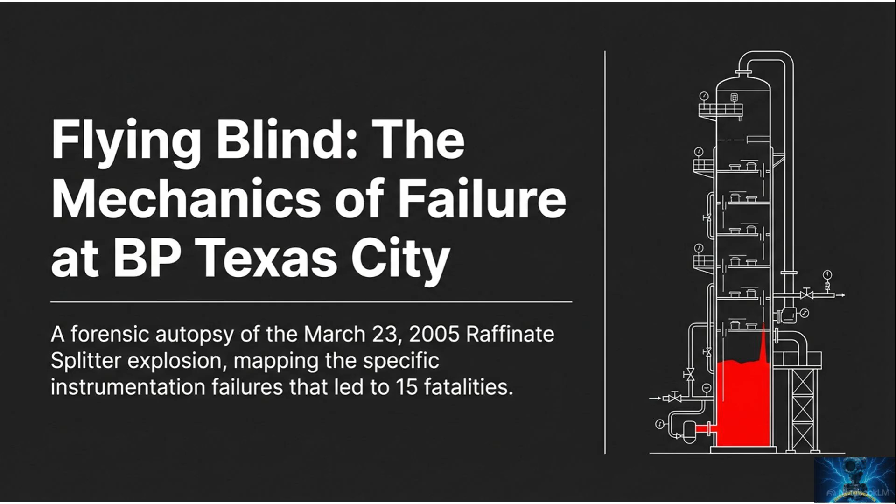On March 23, 2005, the BP Texas City refinery suffered one of the worst industrial disasters in recent United States history. This presentation is a forensic breakdown of how that happened, not as a single freak event, but as a chain of instrumentation failures, degraded safeguards, and management choices. The core lesson is brutally simple: when operators lose sight of physical reality, the plant starts writing its own ending.

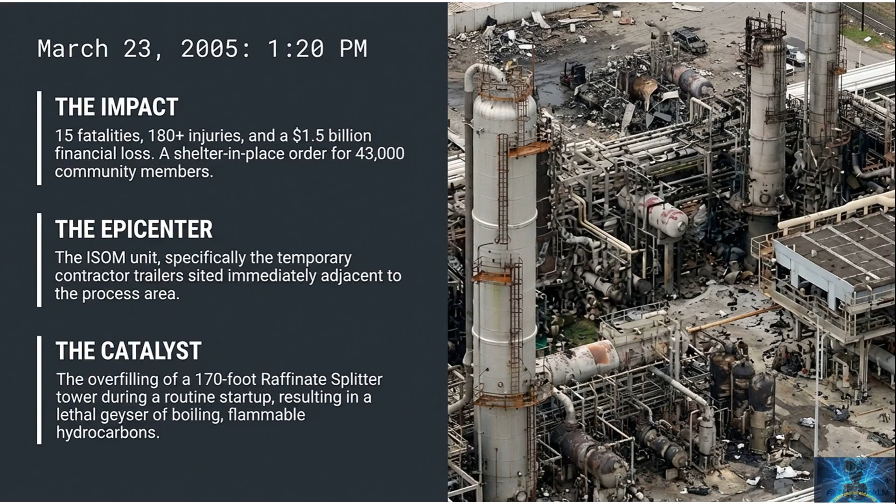March 23, 2005, 1:20 p.m. At 1:20 in the afternoon, an overfilled raffinate splitter tower sent flammable hydrocarbons into a blowdown system that vented to the atmosphere instead of a flare. The result was 15 fatalities, more than 180 injuries, a shelter-in-place order for 43,000 people, and losses exceeding $1.5 billion. The explosion's epicenter was the isomerization unit, especially the temporary contractor trailers placed dangerously close to the process area.

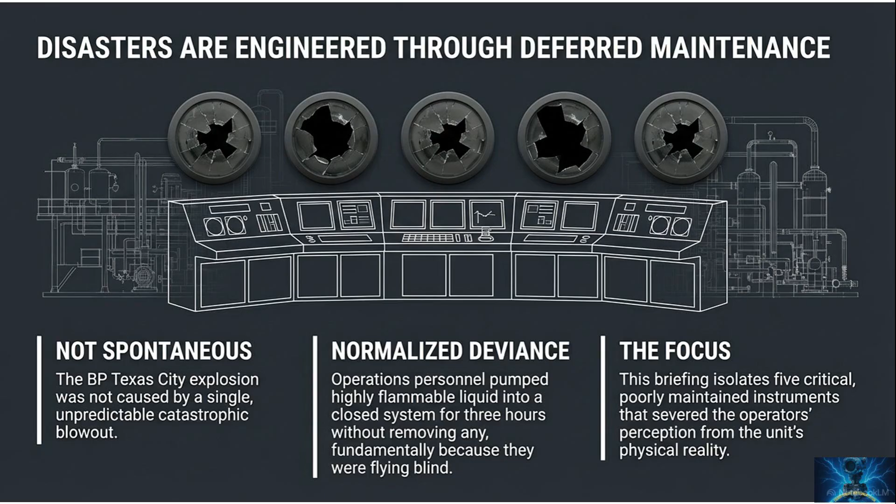Disasters are engineered through deferred maintenance. This disaster was not spontaneous, and it was not just one operator making one bad move. It was built over time through deferred maintenance, weak mechanical integrity, and a culture that normalized deviation from procedure. The real story is not just what failed on March 23rd. The real story is why known problems were allowed to sit there long enough to become fatal.

The apparatus: isom raffinate splitter. The raffinate splitter's job was to separate straight-chain hydrocarbons into higher octane products for gasoline blending. But this tower depended heavily on manual operation and a handful of critical instruments to keep it from overfilling. There was no automatic high-level shutdown interlock to save the day. If the instruments lied, and if operators believed them, the unit had very little protection left.

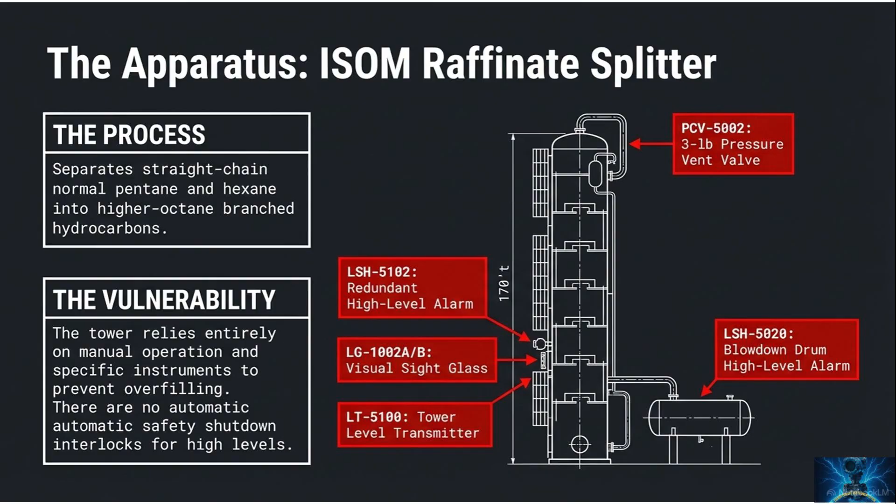By 11:16, the board showed about 93% level, while the real liquid level had climbed to 67 feet. By 12:41, the display suggested about 80% and falling, but the tower was actually around 140 feet full and nearing disaster.

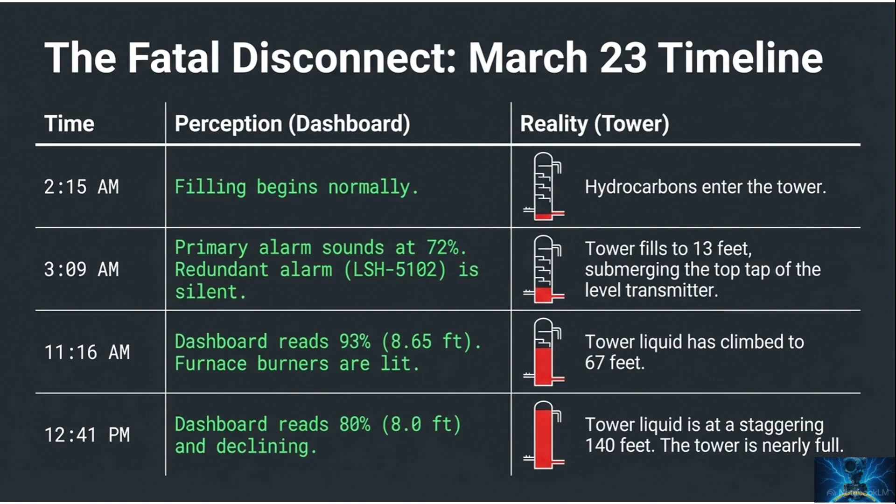1:04 p.m., the blind pilot. By 1:04 in the afternoon, the real liquid level inside the 170-foot tower had reached 158 feet. But the control board still showed only 78%, or about 7.9 feet, on the transmitter's scale. So the operators were effectively flying blind.

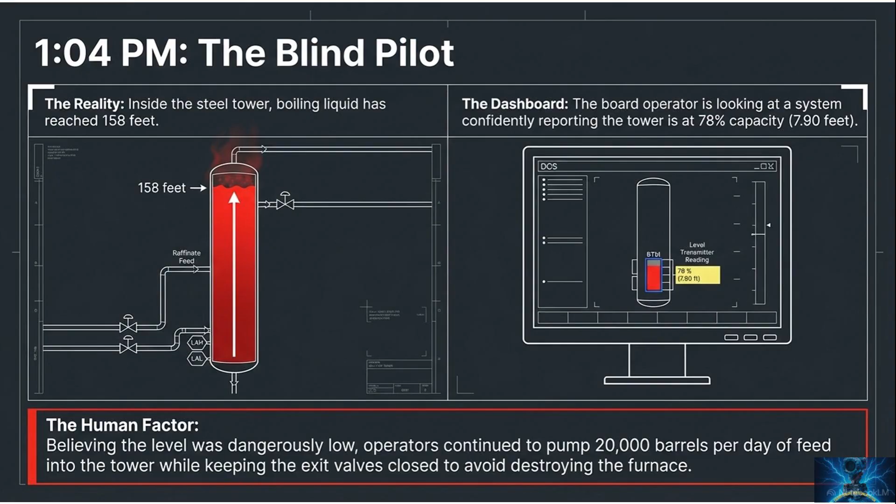Believing the level was low and falling, they kept feeding the system and trying to protect the furnace, not realizing the column was almost completely full.

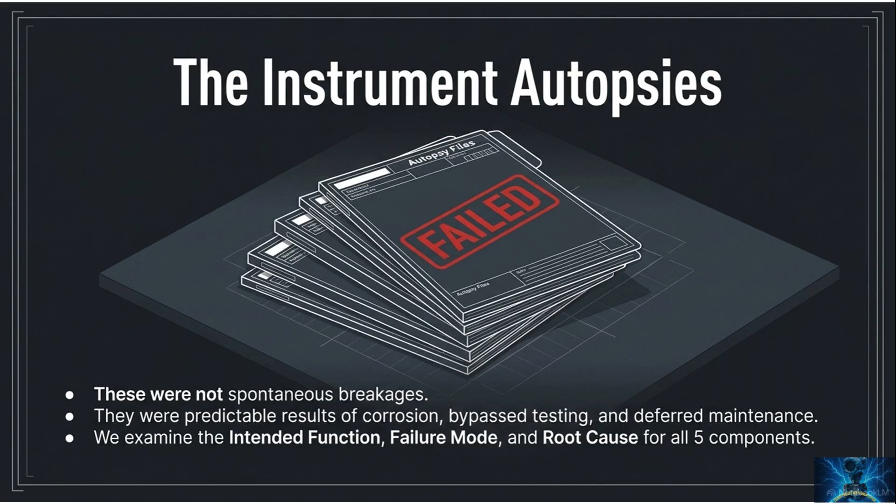The instrument autopsies. Now we move from the big picture into the 5 specific failures that broke the operator's dashboard. These were not random breakages. They were predictable outcomes of corrosion, miscalibration, poor testing methods, incomplete maintenance records, and repairs that were deferred even though the unit was about to start up. Each failed layer made the next bad decision more likely.

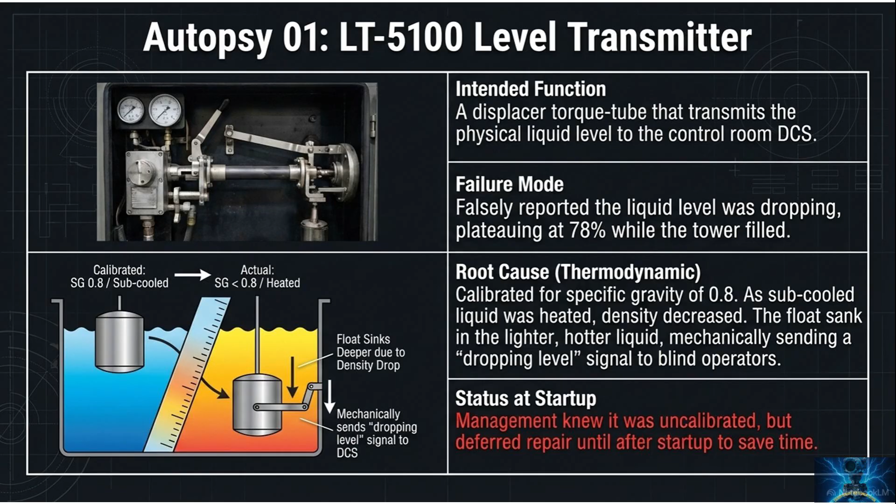The root problem was thermodynamic and maintenance related. It had been calibrated for the wrong specific gravity, and as the liquid heated up and became less dense, the displacer sank deeper and mechanically created a false, dropping level signal. Management knew repairs were needed, but deferred them until after startup. That is industrial Russian roulette with a clipboard.

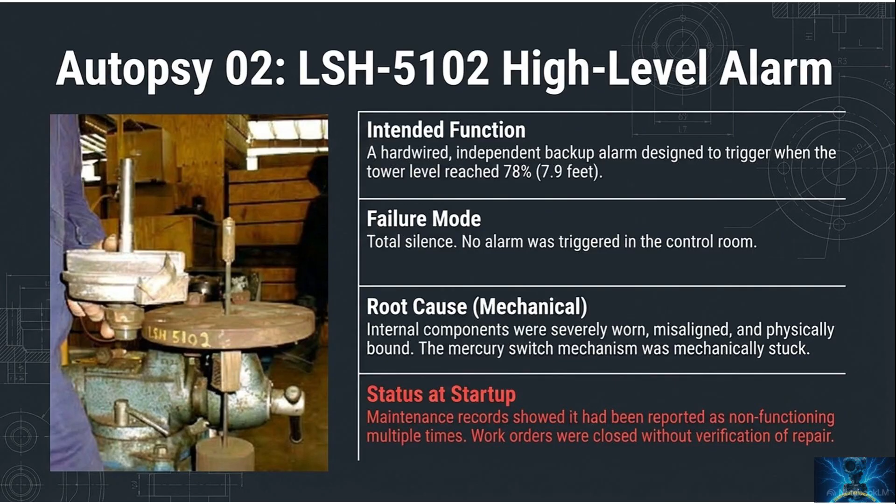Autopsy 02, LSH 5102, high-level alarm. This redundant high-level alarm was supposed to be the independent backup warning if the tower reached a dangerous level. It never sounded. The internal mechanism was worn, misaligned, and physically bound, so the alarm stayed silent when it was needed most. Worse, maintenance records showed it had already been reported as non-functioning multiple times, and work orders were closed without verifying the repair had actually been completed.

Autopsy 03, LG 102A, B sight glass. The sight glass was supposed to give operators a simple visual truth check. Instead, it was completely unreadable because the inside had been coated with years of dark hydrocarbon deposits. That meant the operators had no trustworthy visual backup to challenge the false transmitter reading. So one of the most basic safeguards in the entire system became a piece of dirty glass bolted to the side of a tower.

Autopsy 04, PCV 5002, pressure control valve. This manual pressure vent valve was supposed to help relieve non-condensable gases during startup and prevent pressure spikes.

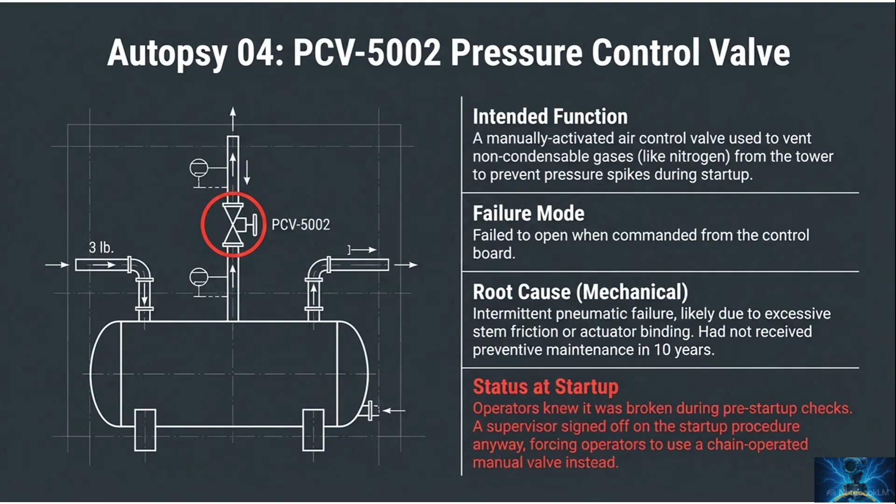During pre-startup checks, it failed to open when commanded. Even so, startup was authorized anyway, forcing operators to rely on a chain-operated manual valve as a workaround. A known bad pressure control element was accepted before the system was even brought online.

Autopsy 05, LSH 5020, blowdown drum alarm. This was the last line of defense. If liquid started filling the blowdown drum, this alarm should have warned operators before the stack turned into a hydrocarbon geyser. Instead, the alarm never sounded because the float had corroded, developed a hole, filled with liquid, and sank.

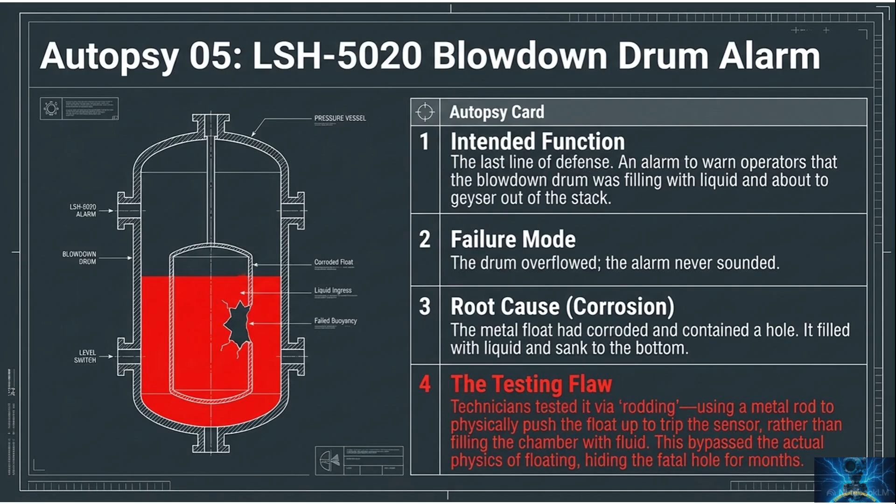The truly maddening part is the test method. Technicians often rodded the float by physically pushing it, which bypassed the actual physics of buoyancy and hid the defect for months. That is not testing. That is fooling yourself with extra steps.

The physics of the overflow. Once the tower was badly overfilled with subcooled liquid, the furnace burners heated that liquid rapidly. As the fluid temperature rose, the liquid expanded and began to boil violently. This was no longer normal distillation behavior.

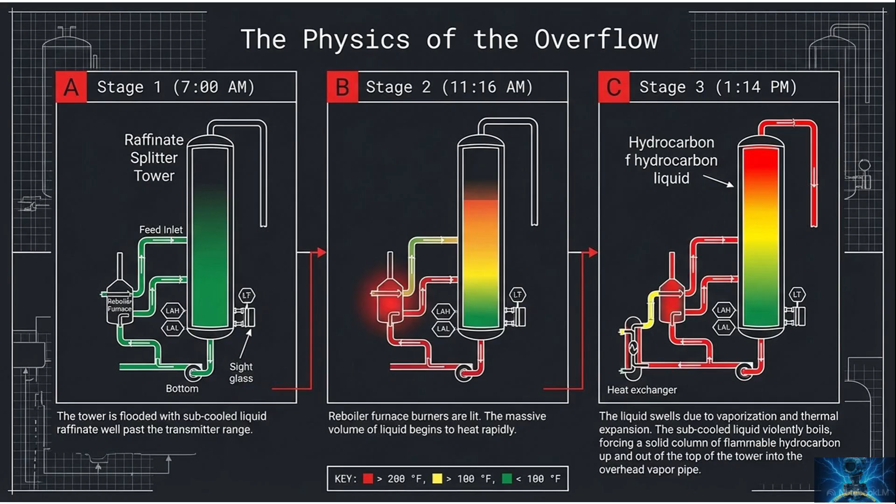It became a solid rising column of flammable hydrocarbon driven upward until it spilled into the overhead vapor line. The system was no longer separating product. It was becoming a giant pressurized launcher.

The hydrostatic trap. Here is the nasty bit of physics that made the relief valves open. The overhead line ran 148 feet down the side of the tower to the relief valves. Once that pipe filled with liquid, the hydrostatic head added about 42 pounds per square inch gauge at the bottom.

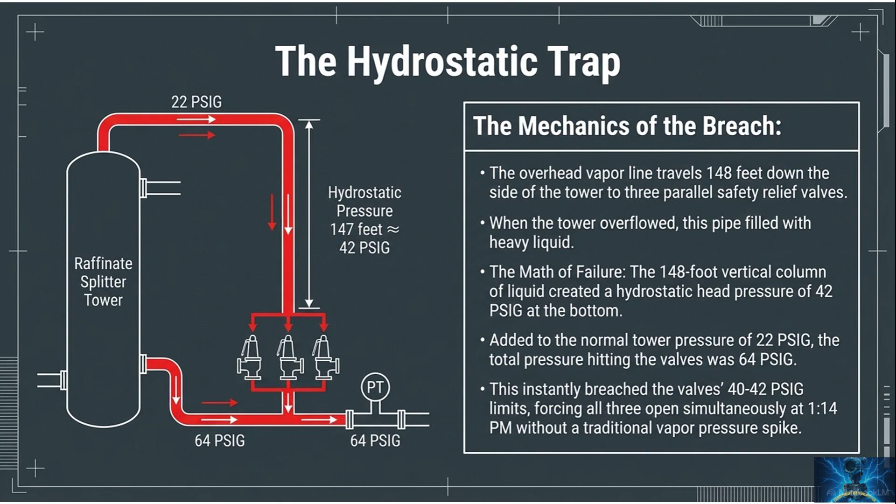Add that to the normal tower pressure of roughly 22 pounds per square inch gauge, and the relief valves suddenly saw around 64 pounds per square inch gauge. Their set points were about 40 to 42, so all three opened. No dramatic vapor surge was needed. Simple liquid head did the job. Physics does not care about what the board operator hoped was happening.

The geyser. A 1950s relic fails. For just over 6 minutes, all three relief valves discharged at capacity. About 51,900 gallons of flammable liquid went into an old blowdown drum and atmospheric stack that had never been connected to a flare. This was a disposal design from the 1950s, still being trusted in 2005.

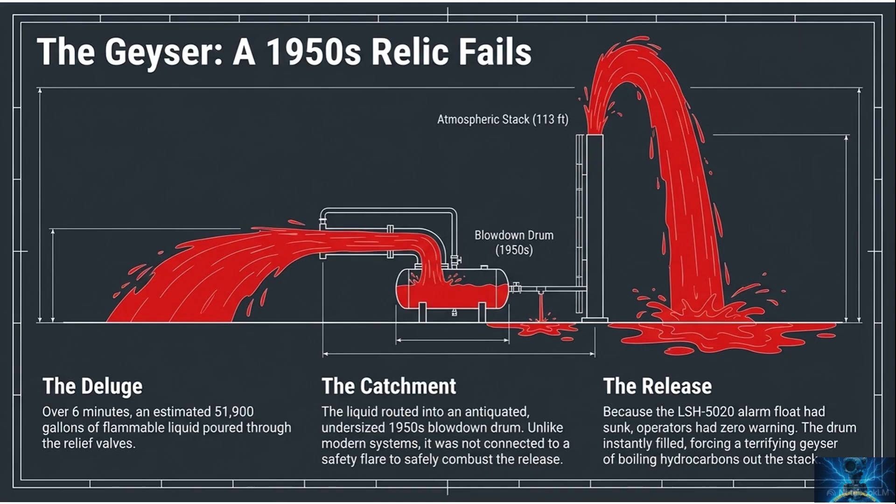Once the drum filled, boiling hydrocarbons blasted out of the 113-foot stack and rained back down into the unit. A modern flare system would have been a very different story.

Confinement and ignition. As the hot liquid fell, it atomized, pooled, evaporated, and formed a wide flammable vapor cloud at ground level. The most likely ignition source was an idling diesel pickup truck parked about 25 feet from the blowdown drum. Witnesses reported the engine over-revving and backfiring as the vapor cloud reached it.

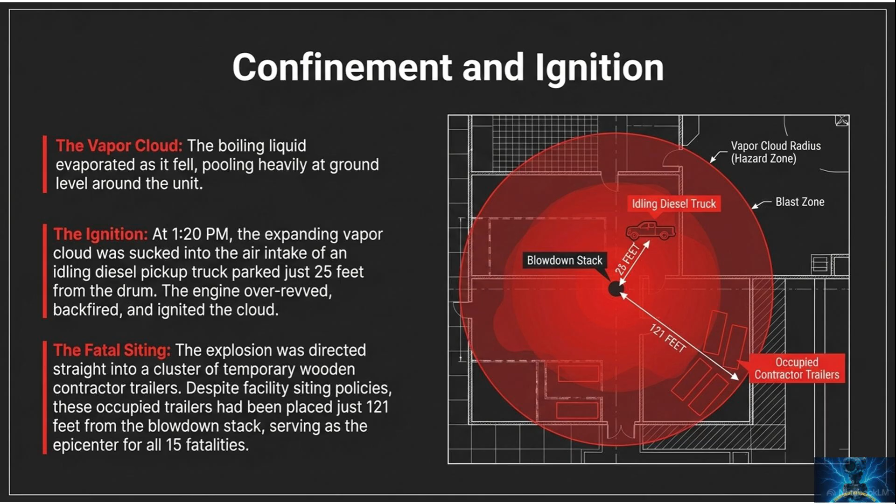And the deadliest part of all was trailer siting. Contractor trailers had been placed as close as 121 feet from the blowdown drum, right where people were most exposed when the cloud ignited. Synthesis, a compromised toolkit.

Put the 5 failures together and the pattern is obvious. The level transmitter was miscalibrated. The redundant tower alarm was broken. The sight glass was unreadable. The pressure vent valve failed pre-startup checks. The blowdown drum alarm had a hidden defect masked by bad testing.

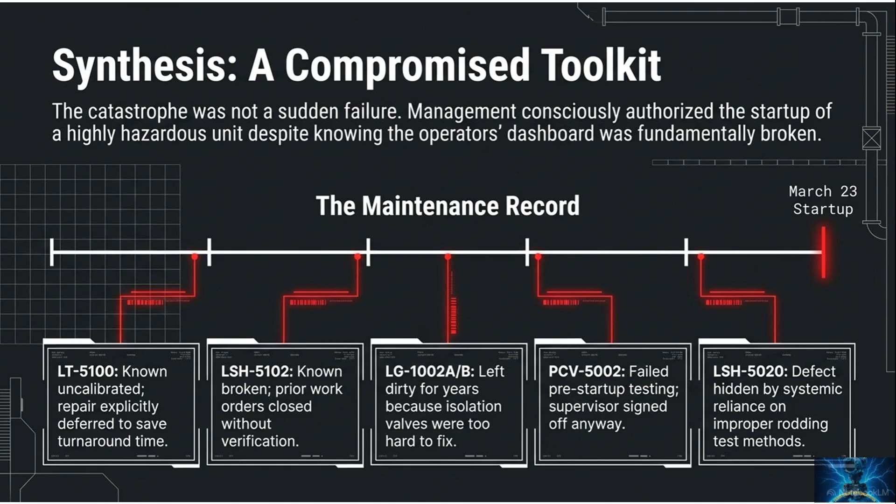A real pre-startup safety review could have forced those issues into the daylight, but that review was not completed. So management knowingly started a hazardous unit with a broken operator dashboard.

The normalization of deviance. One of the deepest lessons here is that the abnormal had become normal. The CSB found that procedural deviations made on March 23rd were common in 18 previous startups. In 14 of 19 startups, the tower had major pressure excursions, and in many cases operators filled the tower above the transmitter range to avoid losing level and damaging the furnace.

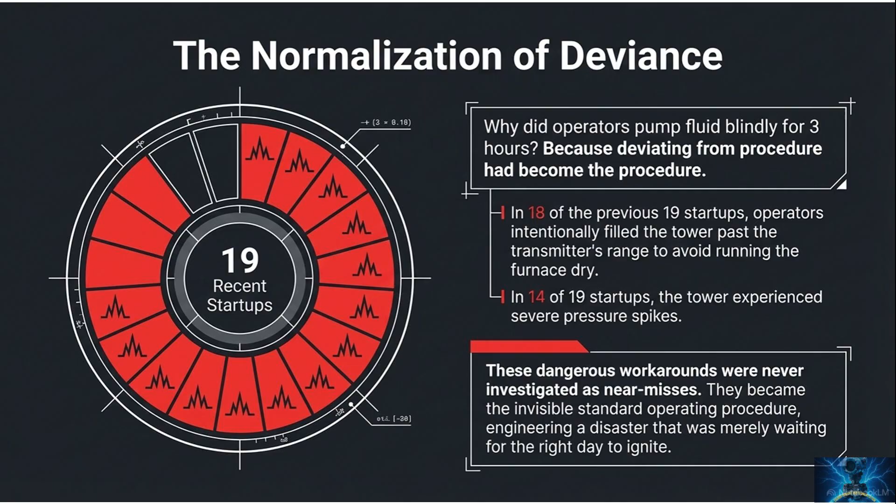Because these repeated deviations were not treated as near misses, they stopped looking dangerous and started looking routine. That is how deviance gets normalized. Not with one reckless act, but with dozens of tolerated ones.

The blueprint to ruin. The BP Texas City disaster proves that catastrophic events often grow out of ordinary, neglected things. A dirty sight glass, a miscalibrated transmitter, a corroded float, a failed valve, a bad testing method, and the production pressure to keep moving anyway.

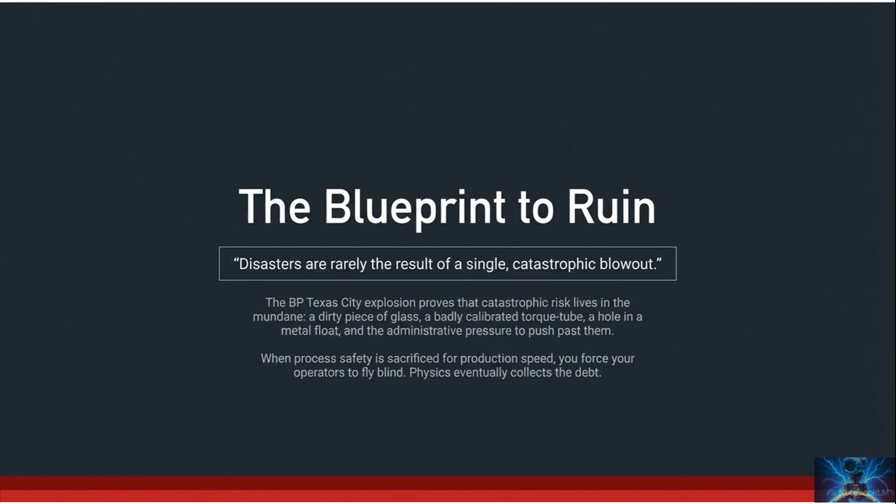The final lesson is not just maintain your instruments. It is bigger than that. When process safety is traded away for schedule, cost, or convenience, you force operators to fly blind. And sooner or later, physics sends the invoice.